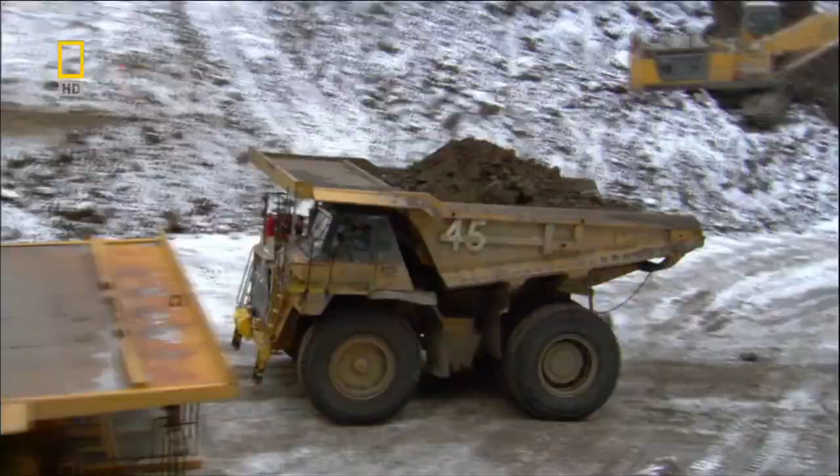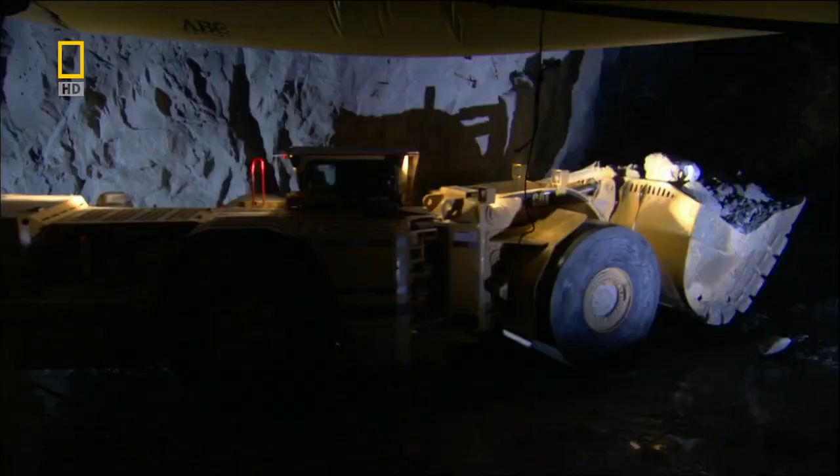Ready for some extreme machines? You don't know what big is until you've met the heavy metal mega movers at the Ekati Diamond Mine. Located just 200 kilometers south of the Arctic Circle, Ekati uses huge machines to work the tundra. Dump trucks as wide as your house, shovels bigger than a school, and drills taller than roller coasters. These monsters access more than 5 million carats of diamonds every year. To do it, they have to overcome incredible challenges, battling killer cold, moving mountains of earth, and blasting to dangerous depths. Only the toughest will survive.

Northern Canada, one of the most forbidding places on Earth. Early explorers called this flat expanse the Barren Lands. But for a team of extreme machines, this is home. The Ekati Diamond Mine, over 2,000 square kilometers of diamond-studded Earth.

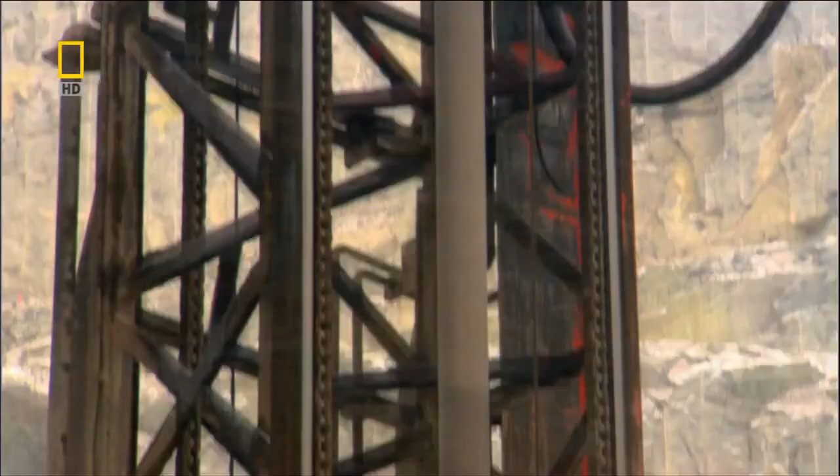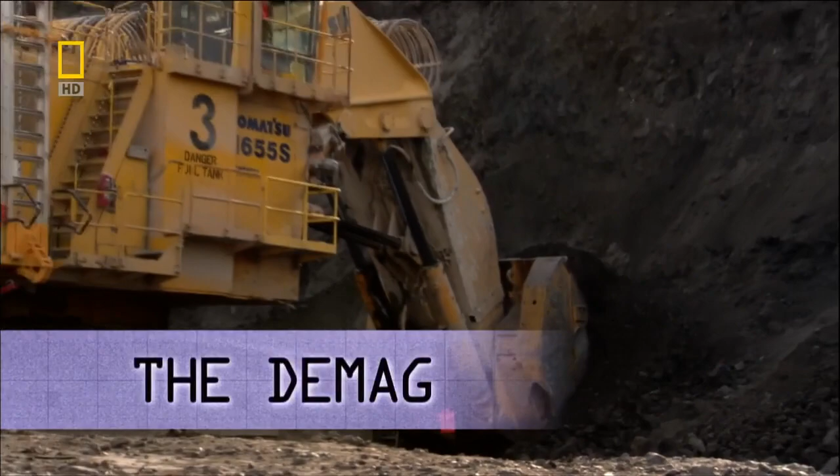Three mega movers partner up like heavyweight wrestlers to pull the riches from the land. The nearly 30-meter tall D90 rotary blast drill, aka the driller. The Demag 655 hydraulic shovel, a 4-story monster simply called the Demag. And the 160-ton Caterpillar 793 haul truck, nicknamed the Cat.

In their quest for diamonds, these machines will power through damaging rock and punishing weather. The future of the mine depends on their success.

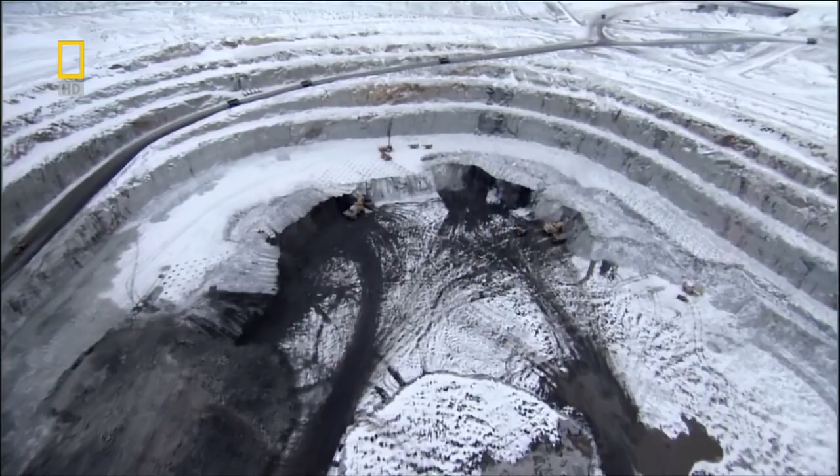The mega movers have two critical missions. First, build an underground tunnel to reach diamonds deep below an existing pit. Second, get a new pit, codenamed Fox Pit, into production, stat. The Fox Pit will be an open pit mine. That means it will be dug from the surface down. Tens of millions of tons of rock must be removed to access the diamonds below. The mega movers will have to work in expert coordination to move this mountain of earth.

The driller kicks things off with a blast. The massive machine bores holes as big as tree trunks for the explosives crew. Everything about this rig is big.

Here's a guy. Here's his home. And here's the driller.

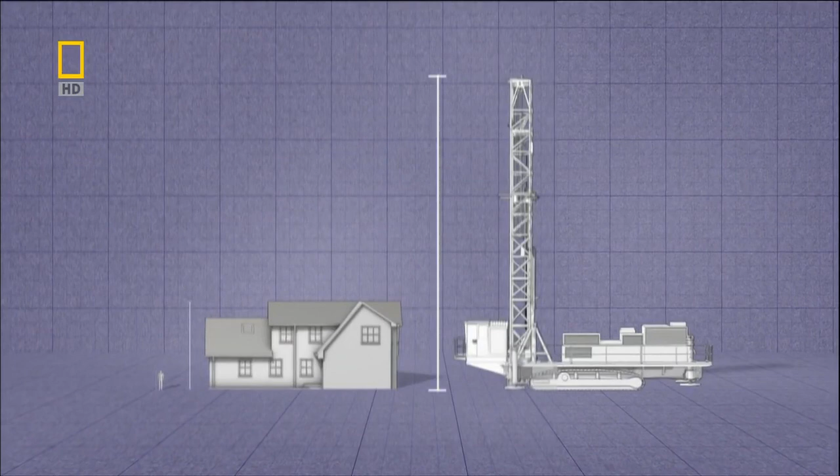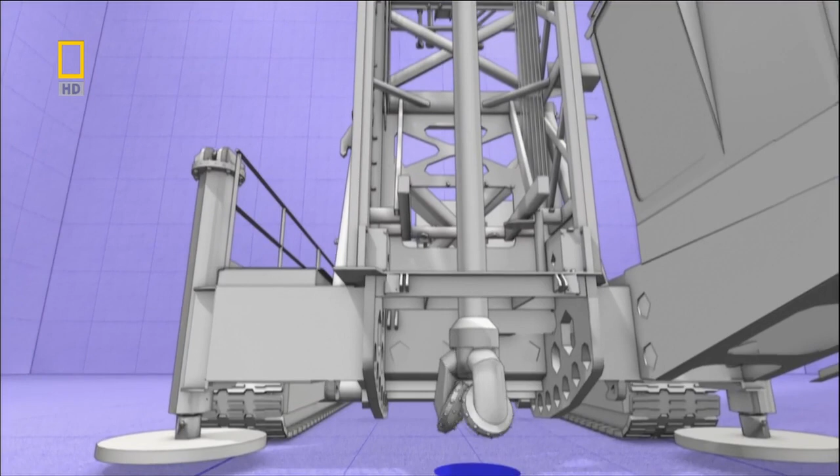The driller combines overwhelming power with a wrenching twist. 30 meters above, a massive rod slams down against the rock face. The sharp, angled tip can rotate nearly 100 times per minute. In just half an hour, it can pound holes one-third of a meter wide and 17 meters deep.

Once the driller's opened up a new section of the pit, his partners go to work. The captain of the team moves in, the gigantic Demag shovel, the biggest piece of machinery on Ekati's mine site.

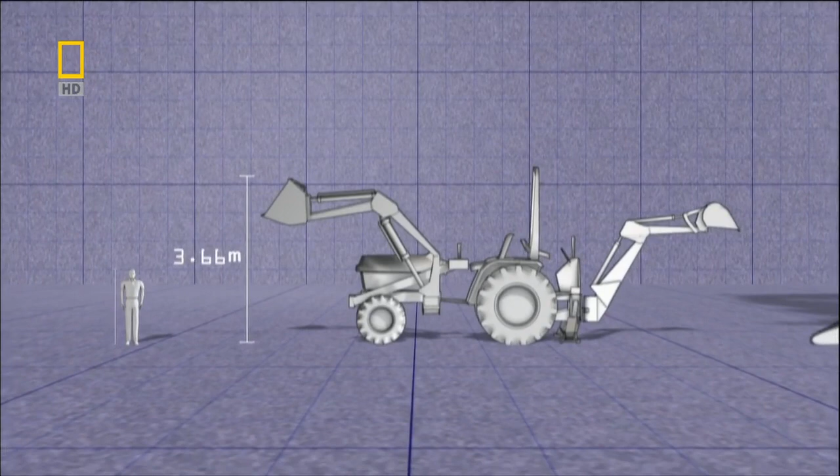This Demag operator stands 2 meters tall. And here's a 4-meter backhoe. And here's the Demag.

This monster stands 4 stories high with a shovel that can hold 40 men. Its jagged teeth are coated with a special steel alloy so that it can chomp through frozen granite, one of the hardest rocks on Earth. The 14-meter arm is powered by a pumping set of guns, 4 massive cylinders that give the Demag the strength it needs to carve the rock.

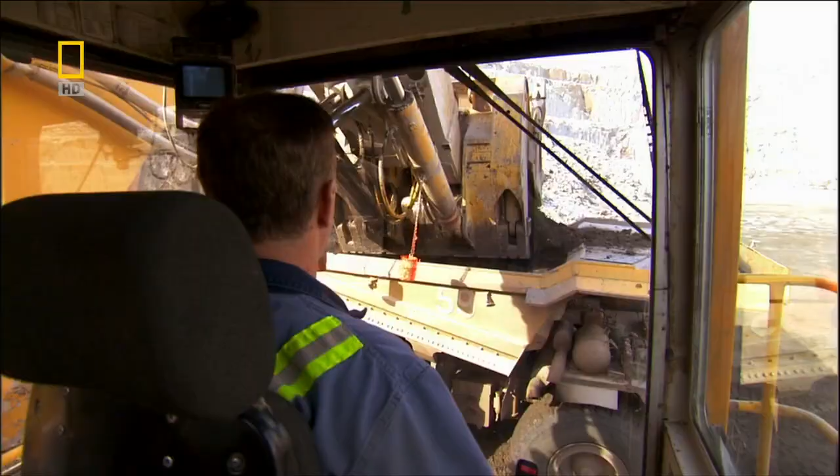When the Demag's teeth bear down on granite, the pressure's so intense it creates glass. The Demag uses this overwhelming strength to move tons of rock fast. It's incredible, actually. We can put about 240 tons, or 218 metric tons, on a truck in 2 minutes or less. We try and keep it under 2 minutes.

After grabbing a mouthful of rock, the Demag tosses the load to his teammate, the super-sized Cat haul truck. This bruiser tackles loads that would destroy ordinary machines. The Cat is just the truck to haul a mountain of subarctic earth.

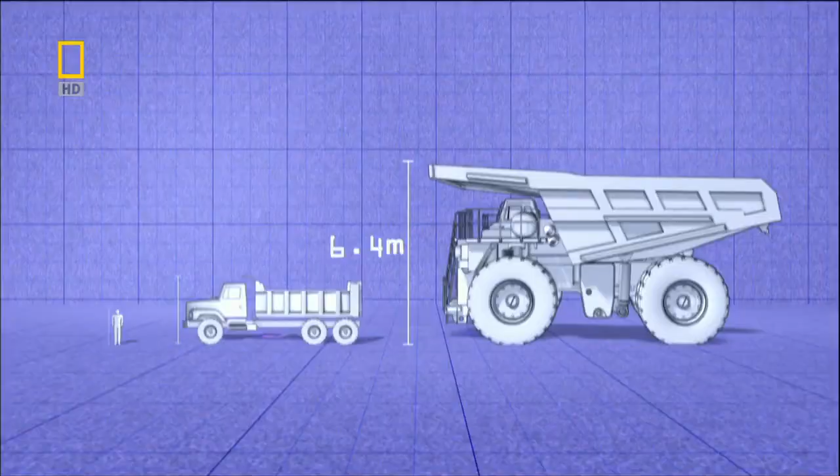Here's a Cat driver. And here's a normal dump truck. It's almost twice his height. And finally, the Cat. It towers over 2 stories high. Its wheels alone are nearly 4 meters tall.

But the Cat's most impressive feature? Its massive bed, so big it could carry a dozen cars. In the Fox Pit, the Cat's in constant motion, hauling hundreds of tons of ore.

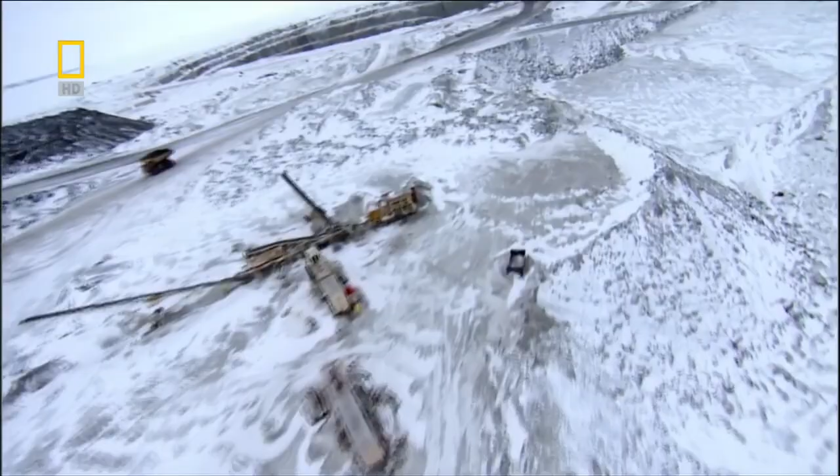This is an all-star team of heavyweight movers. Ekati needs tough characters if it's going to get the Fox Pit in production. Diamond mining anywhere is hard work, but in the subarctic it requires spectacular strength and determination.

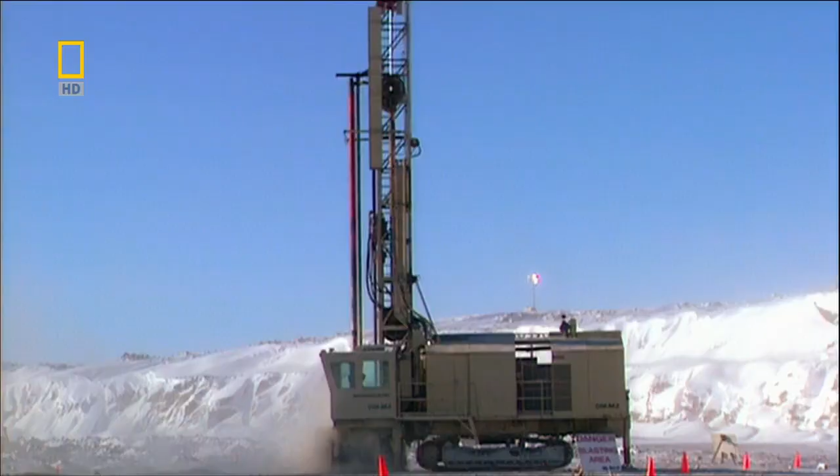For decades, few believed that diamonds could be found so far north. But in the 1980s, a team of geologists discovered special minerals, called indicator minerals, that are often found in diamond-rich regions. The geologists began hunting for diamonds, drilling deep underground. Just over 100 meters down, the team struck pay dirt, a mineral formation of some of the largest, highest quality diamonds ever discovered.

They christened the site the Panda Pit and formed the Ekati diamond mine. But the challenges were just beginning.

Like all mining operations in the far north, Ekati poses environmental hazards. Mining creates waste rock and pollutants and can disrupt wildlife. To protect the tundra's delicate ecosystem, Ekati works with the Canadian government to monitor pollution and oversee replanting to minimize the mine's impact on the land.

The operation's lasting effect is a matter of debate, but one thing is certain: as long as the public wants diamonds, they'll continue to be mined.

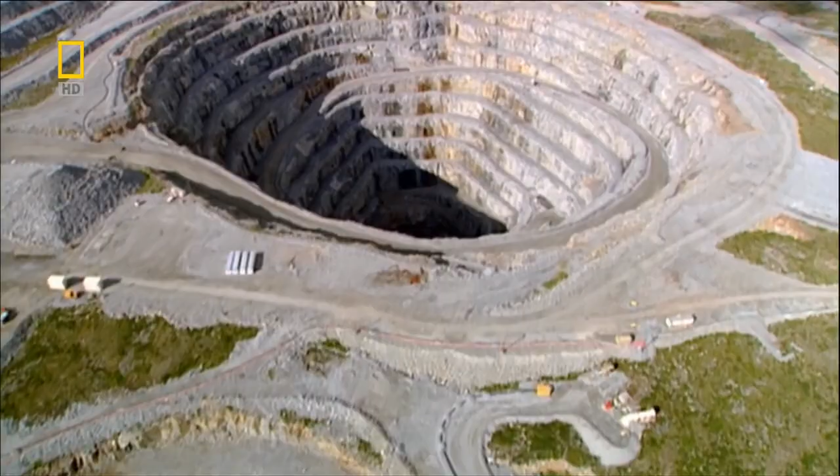Yet the valuable stones are a limited resource, and the surface pit at the Panda mine was harvested of diamonds over a year ago. It's now closed. But recently, Ekati came up with a radical new plan, one that could bring the Panda mine back to life.

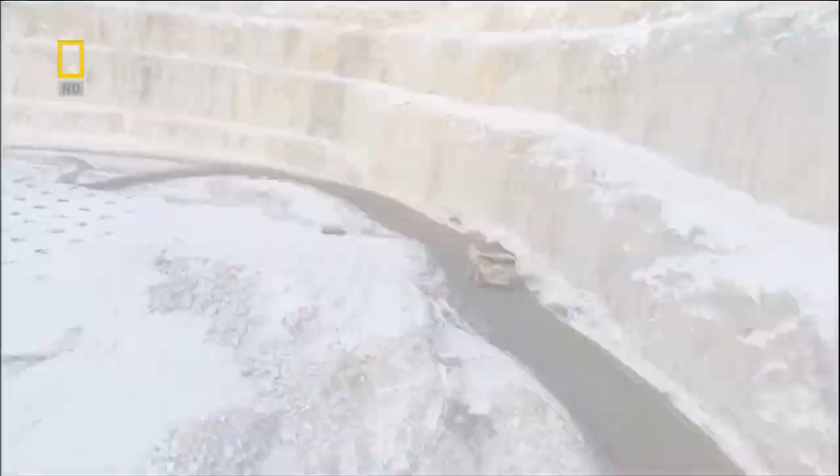Geologists believe a narrow pipe of diamond-rich rock lies waiting just below the Panda Pit. The trick is how to get it out.

The mega movers can't get this deep, but a tunnel could access the previously unreachable gems. To build it, Ekati will use a crack team of underground machines. They'll dig a tunnel 2 kilometers long, removing approximately 200,000 tons of earth. The project, nicknamed the Panda Tunnel, broke ground in 2003.

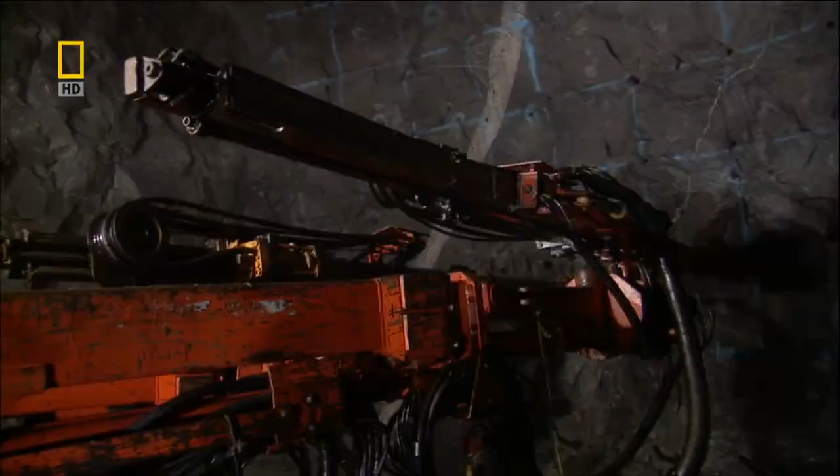If the mission is successful, Ekati can access a whole new stock of diamonds. Engineers say the Panda Tunnel could deliver close to 5 million carats, including some of the highest quality gems produced from the claimed site. The stakes couldn't be higher. Future loads from the Panda Tunnel and the Fox Pit have to yield pay dirt.

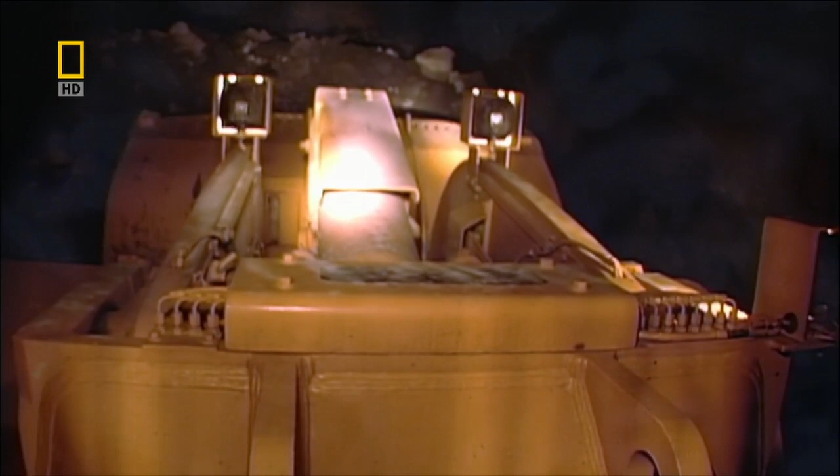Diamond-encrusted earth. These sparkly rocks are what the mission is all about. To get the prize, the mega movers will use muscle in the Fox Pit. But down in the tunnel, where the giants can't go, a crew of mining machines relies solely on strategy. The work will test both teams to the max.

Ekati runs on a brutally simple equation. The mine must find 1 carat of diamonds in every ton of ore.

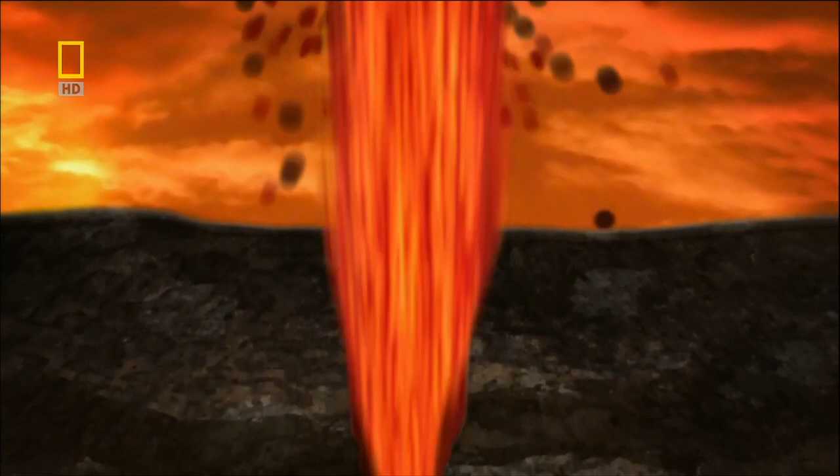This landscape may seem cold and forbidding now, but millions of years ago it was a subterranean hotbed of activity. Violent volcanic eruptions gushed from deep inside the Earth. Lava spewed upwards towards the Earth's surface. It carried a hidden treasure, tiny particles of carbon that had compacted from inner Earth pressure and heat. Diamonds. The diamond-rich lava quickly cooled. It formed carrot-shaped pipes of rock called kimberlite. These kimberlite pipes are what Ekati mines today.

The mega movers shovel out the large carrot top of the kimberlite pipe. And soon, with the Panda Tunnel, Ekati hopes to mine the narrow, rich root. But a major obstacle stands between the machines and their prize. A layer of granite surrounds the kimberlite like a bank vault holding gems. The only way to get the treasure out is to break in.

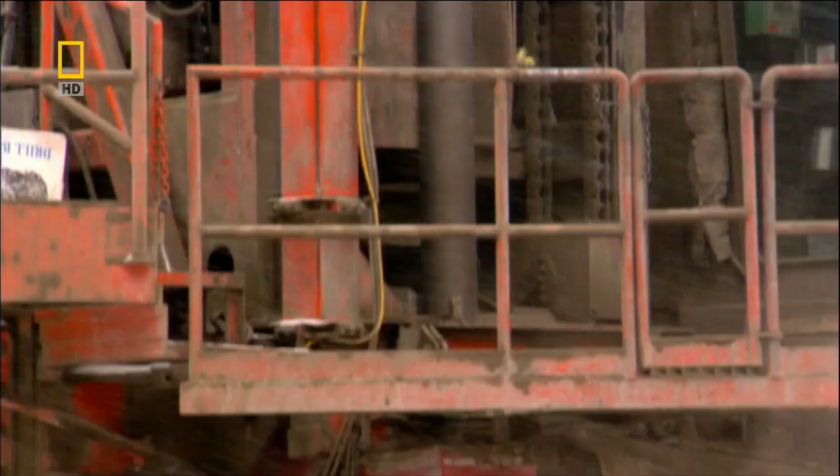Expertly trained operators drive the beasts. It takes months of on-the-job training to fill this seat. Perched high above the Fox Pit, dispatch hands out orders and monitors all that goes on below. Like a nerve center, dispatch is the brain behind the mega mover's muscle. It keeps the metal giants constantly moving in the right direction.

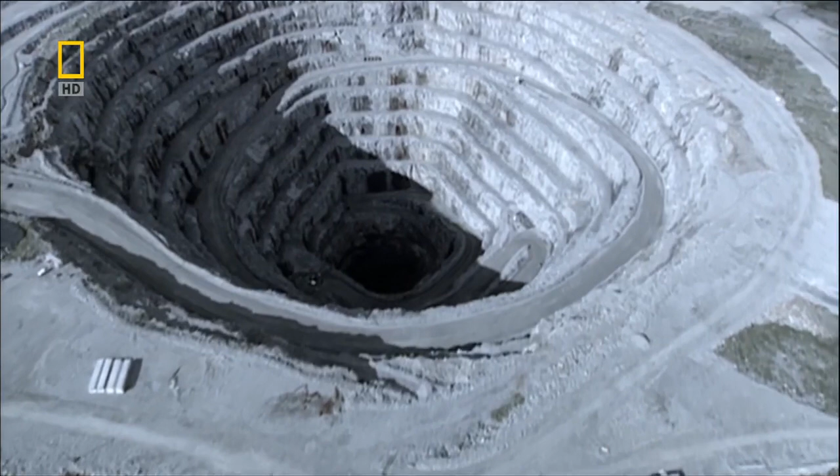The mega movers carve the pit according to the shape of the kimberlite pipe. The machines scrape away at the granite to reveal a dark layer of diamond-bearing kimberlite below. They make smaller and smaller circles as the carrot-shaped pipe descends into the earth.

The machines leave a platform as they sculpt. It's called a bench, and it strengthens the rock face. The terraced walls protect against deadly landslides, and they offer an easy way in and out of the pit.

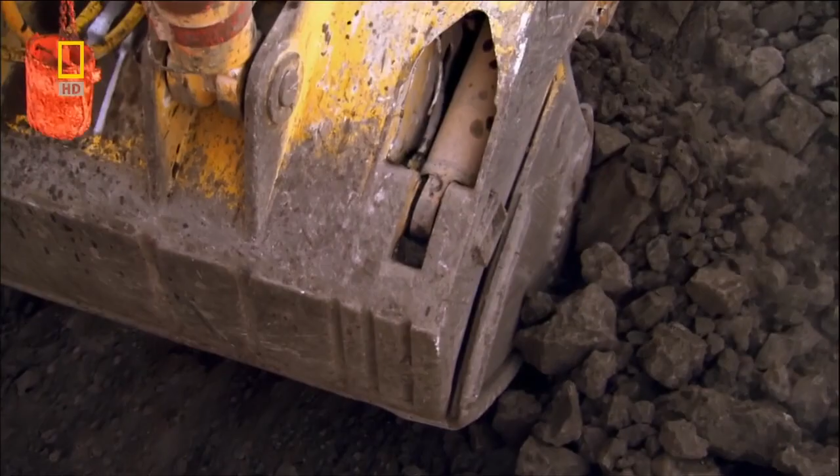The mega mover's assignment in the Fox Pit is deceptively simple. The machines remove 500,000 tons of granite and kimberlite every week. But here in the subarctic, the vicious cold and granite can take their toll, slowing the machines down. For Ekati, movement is money, and staying in motion is the only way to get the job done.

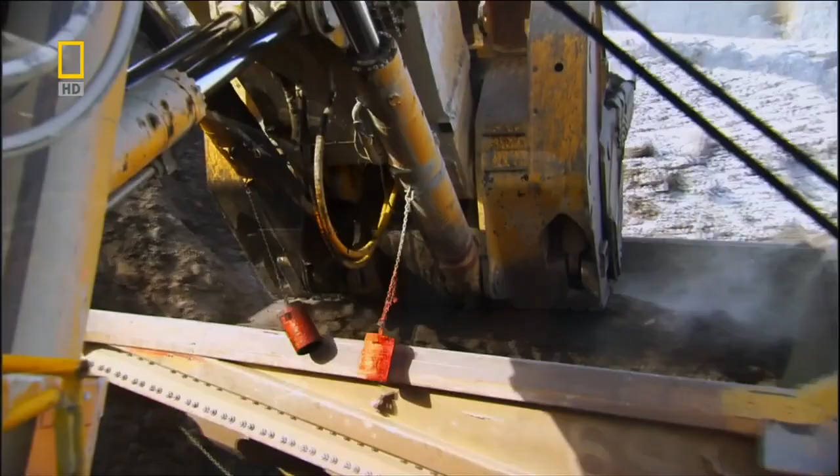The mega movers tackle the challenge with a proven 5-step strategy: drill, blast the rock, scoop up the rubble, haul it to the plant, and separate the diamonds from the dirt. It all starts with drilling time.

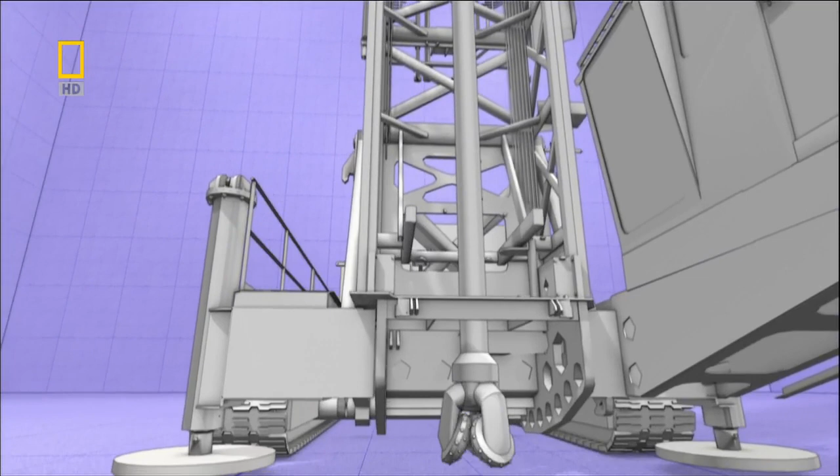While 4 leveling jacks hold the base steady, the driller locks and loads. Each time the drill bit hits the ground, sharp angles on the bit chip the earth. It rotates so fast, it looks like a twister. In less than 30 minutes, the driller makes a 17-meter hole in the armor-hard rock.

But even the driller has a tough time with the resistant granite. The rock wears out dozens of drill bits a month. After drilling about 100 holes, it's time for another bit. At $3,000 per bit, it's a pricey operation.

Just the pounding that the drill bit does to get down to the solid rock, that's what takes a toll on a bit.

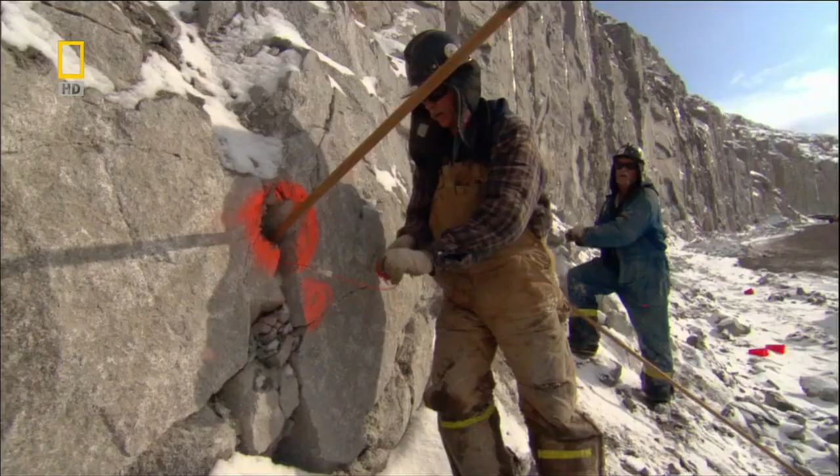Meet the demolition team, a 4-man crew known as the Blasters. 12 hours a day, the blasters feed the drillers' holes with packs of ammonium nitrate, often braving falling rocks and temperatures so low they can snap freeze exposed skin in seconds. We do try to do it as efficiently and safely as possible, because things go wrong, and that's not a good thing when you're dealing with explosives.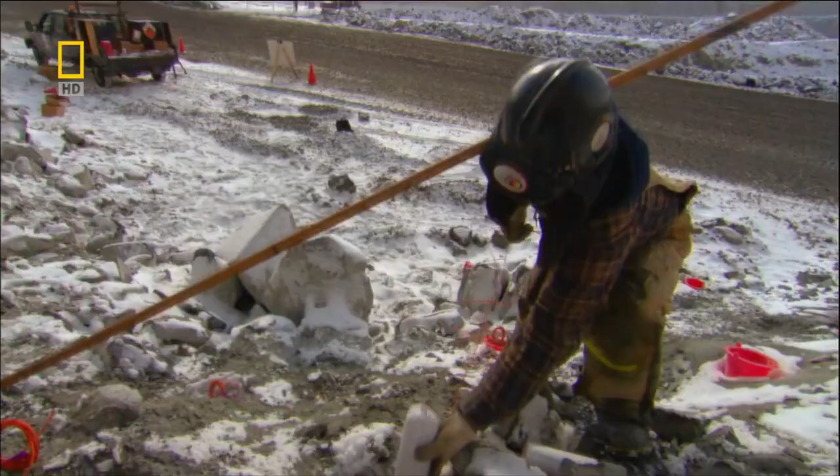The blasters map out the detonation site. It's more than a half-kilometer long plot. They follow a plan called the blast pattern that shows where to place the explosives. Today's blast pattern has almost 200 holes. The blasters plant each with about 800 kilograms of explosives, enough ammonium nitrate to rip a man to pieces and turn granite into flying shrapnel.

The detonation will demolish about 50,000 tons of rock, a huge chunk of the pit face. To see how big that is, watch as everyone clears the pit. The last truck out crosses right over the demolition zone. It looks like an ant on a highway.

Now, blast time. 5, 4, 3, 2, 1.

Let's see that again. A main detonation wire links the fuses on each of the blast holes. As the main line burns down, the explosives ignite in a flash of red like a string of firecrackers.

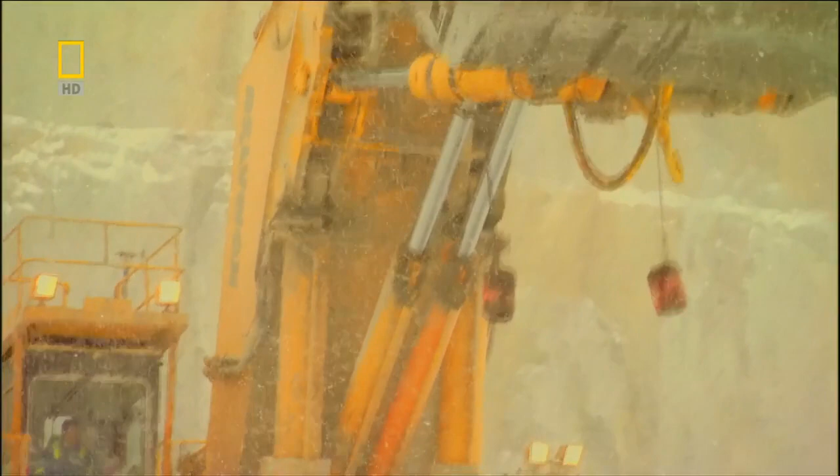Next, step 3, shovel, starring the King Kong of Ekati, the Demag. This brute is the first mega machine back into the danger zone, ready to devour the remains. The Demag is an insatiable monster. Every hour its bucket or clam scoops up to 4,500 tons of kimberlite, the equivalent of 900 school buses.

It has to move fast. The operator has just 5 seconds to load his bucket and just 30 seconds between dumps. This heavy lifting requires brawn and brains.

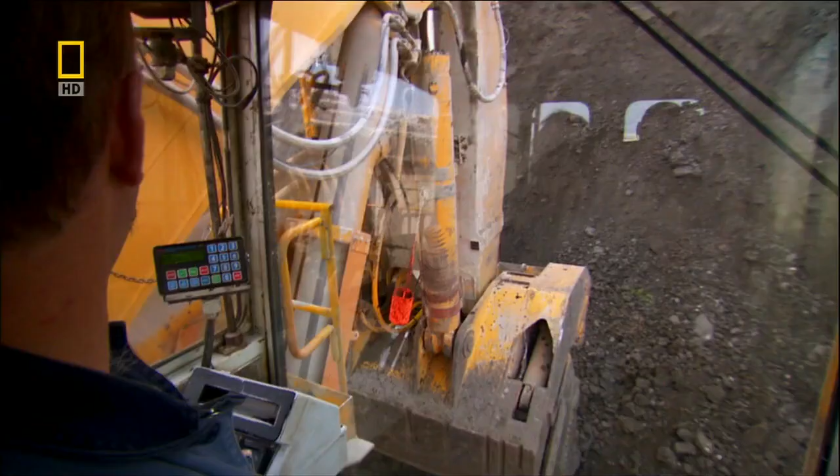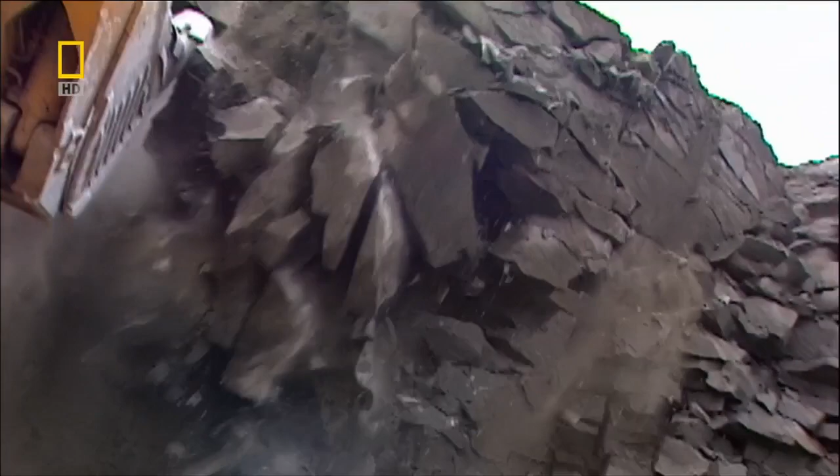As the Demag shovels, it sculpts the pit face. Using its full 4 stories of height, the Demag pulls away the crumbled rock, starting at the bottom of the pile and carefully scraping up. One false move and tons of unstable rock could come pouring down the cliff, and a granite landslide is an ugly way to go. Just in case, the Demag has an armored windshield and a dead man switch to cut the engine if the situation gets out of control.

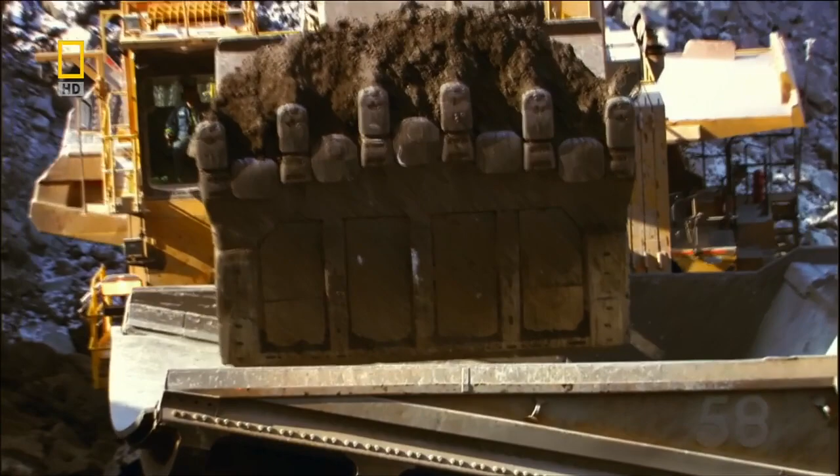Step 4, hauling with the cat. Where there's a DMAG, you're always sure to find its accomplice, the cat, ready to carry off the loot. The cat is the team's champion weightlifter. It catches 4 full scoops from the Demag before filling up. The cat's designed to catch punishing loads.

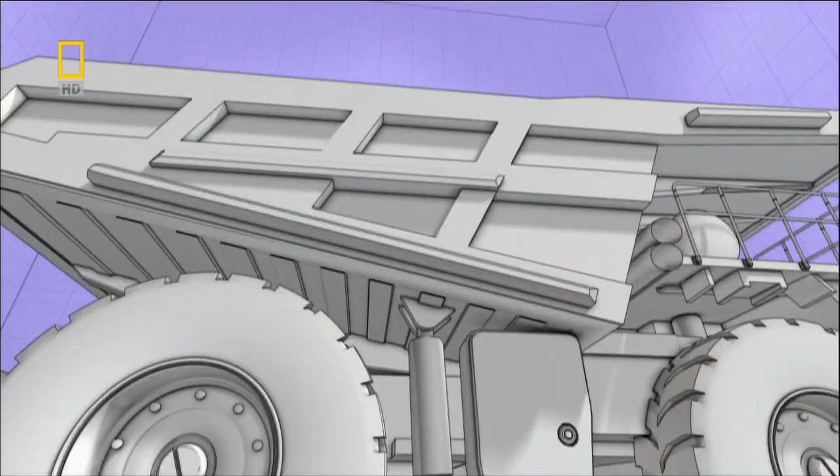An 8-degree V-slope bed gently receives unstable loose rock and shifts it to the bed's center. This protects the cat from losing its balance during loading, an important feature when the mega truck's hauling 218 tons of diamond-studded rock. That's like carrying 3 dozen elephants. Few other dump trucks on Earth can handle such a heavy load. Hugging the steep access road, the cat prowls to its final destination.

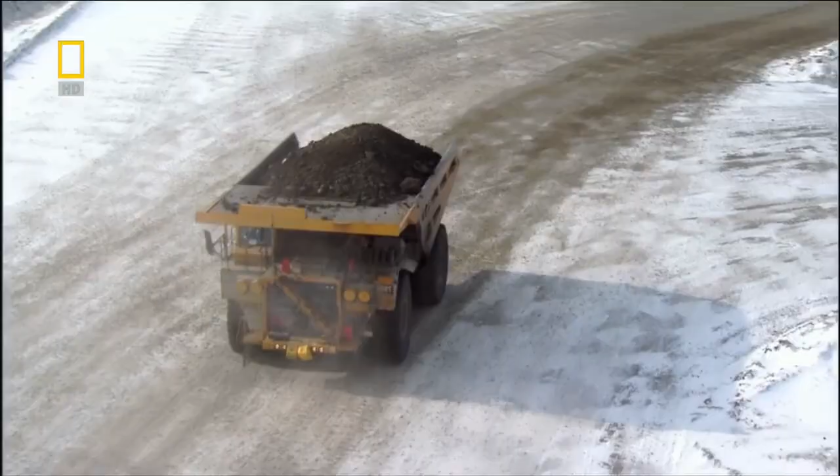Step 5, processing. The process plant is the heart of Ekati's mining operation. It's here that diamonds and dirt part company. This is a non-stop operation, processing 12,000 tons of kimberlite ore a day, 24 hours a day, 7 days a week.

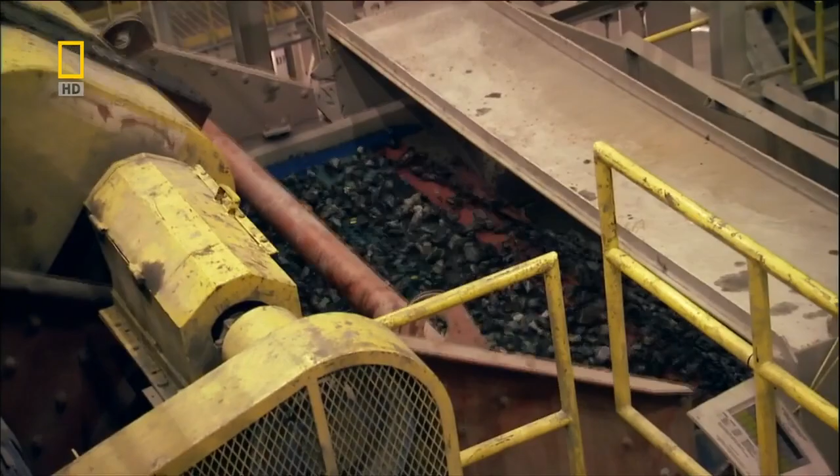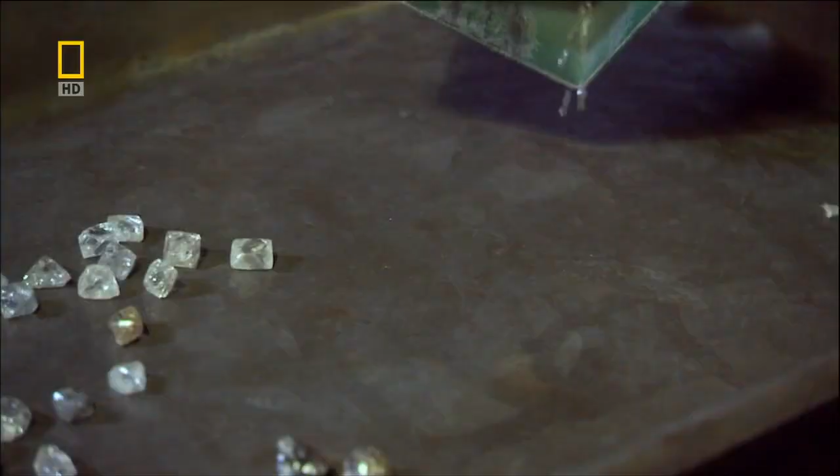At the plant, the diamond-bearing ore is crushed and scrubbed, ground and sorted. In the final stage, the diamonds are recovered via X-ray machines and grease tables. From this, the plant yields about 1 diamond carat per ton of ore. That's about a coffee can of diamonds a day. It may not sound like much, but at that rate, Ekati extracts about 5 million carats of diamonds a year. The rough stones are then cut and polished and sent to Belgium to be sorted and sold.

As the mega movers push ahead in the Fox pit, deep underground, the Panda team moves closer to their goal. A band of unique subterranean machines have been constructing the tunnel for months. The tunnel is a narrow 5-meter wide passage stretching down to the kimberlite pipe, only 40 meters in diameter. A conveyor belt will bring the ore directly to the process plant. If this were to scale, the tunnel would look like a thread.

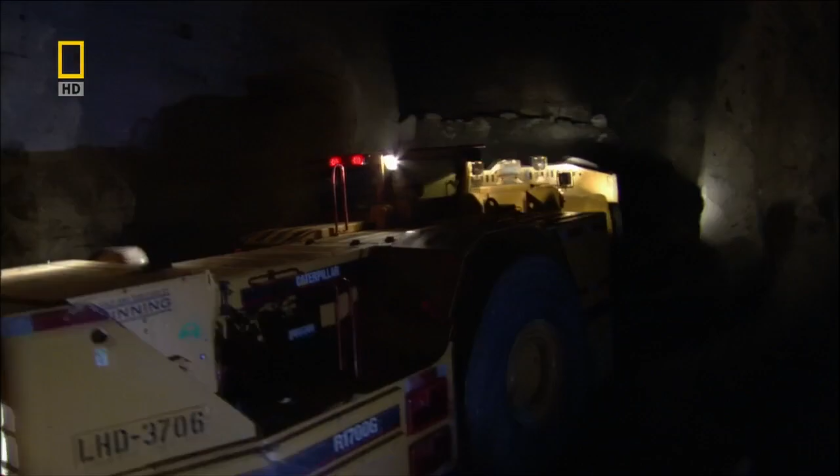Tunnel construction is always challenging work, but the Panda tunnel is harder than most. It will be extremely long, more than 2 kilometers. At that length, getting the tunnel to line up with its target is a high-stakes feat of engineering. Even the slightest miscalculation in direction can take on troublesome proportions over a 2-kilometer course. And this tunnel must be completely straight, or the conveyor belt can't be installed.

To make matters worse, down here, compasses aren't accurate. Instead, engineers must rely on charts and graphs. Above ground, the machines win with muscle, but underground, precision and accuracy are what counts. The engineers regularly check coordinates. At the moment, the tunnel looks spot on. We've done a test hole, and from the test hole indications, the line is bang on, and the elevation seems to be pretty close to where we should be.

As the team digs towards the hidden treasure, the Ekati camp braces against an approaching deadline. The mine depends on the outside world for supplies, but a change of season is about to force their supply road to close. The next few days are Ekati's last chance to haul in most of the crucial supplies the machines need to pull off their missions. Without the right equipment, the mega movers won't make it through the months ahead.

Ekati is one of the most remote diamond mines on Earth. Located in Canada's Northwest Territories, it's just 200 kilometers below the Arctic Circle. The closest city is Yellowknife, over 300 kilometers away.

Keeping Ekati and its monster machines rolling is like taking an army to the dark side of the moon. Mega parts, fuel, building materials, everything has to be shipped in. It's a huge job, requiring a fleet of monster trucks called Super Bs, which can haul 80 tons in a single load.

But there's only one road into Ekati, the Ice Road, made almost entirely of frozen lakes and marshlands. It can only be used for a brief 8 to 12 weeks in late winter, when the ice is thickest. The rest of the year the weather's too warm, the frozen lakes melt, and the marshland becomes dangerously soft, unable to bear the weight of the Super Bs.

This means the trucks have just 2 months to haul a year's worth of the most critical supplies to the camp. If they fall short, the mega movers won't have what they need to run, and the mine could face a shutdown. Now, with spring right around the corner, the final convoys embark on a risky trip across thinning ice.

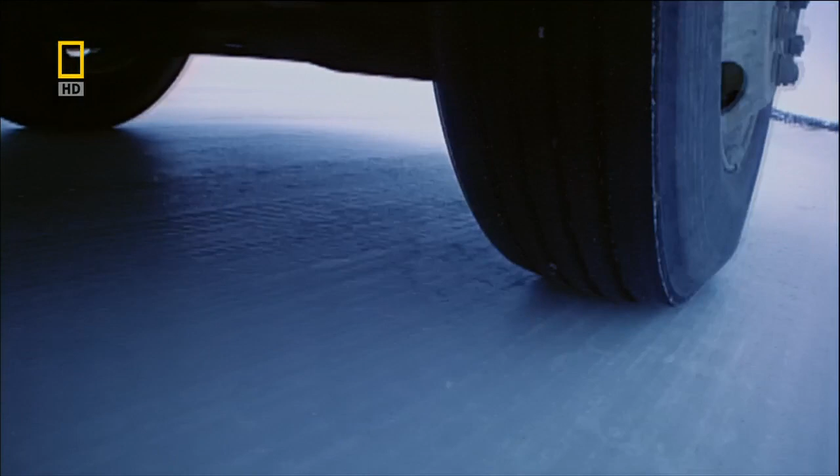The loads that are coming now are priority loads that have to get in, that can't be flown. The trucks are loaded with critical supplies: ammonium nitrate to blast the frozen rock, and a special Arctic-grade fuel to keep the mega movers running in the subarctic. It's an explosive payload, made even more dangerous by the ice road's deteriorating condition.

After just 2 months of use, it's torn up from the heavy freight trucks. This last caravan will have to be careful not to put too much weight on the ice road at once, or risk crashing through.

So the Super Bs travel in small groups of 4, driving a kilometer apart to give the road time to heal. As we're rolling along, you're fracturing the ice and there's cracking taking place. With a kilometer apart, you get a chance for the ice to heal a little bit, and also it doesn't put too much weight in any one spot.

15 hours later, they roll into Ekati. The dangerous run has gone off without a hitch. But there's a development at the mine.

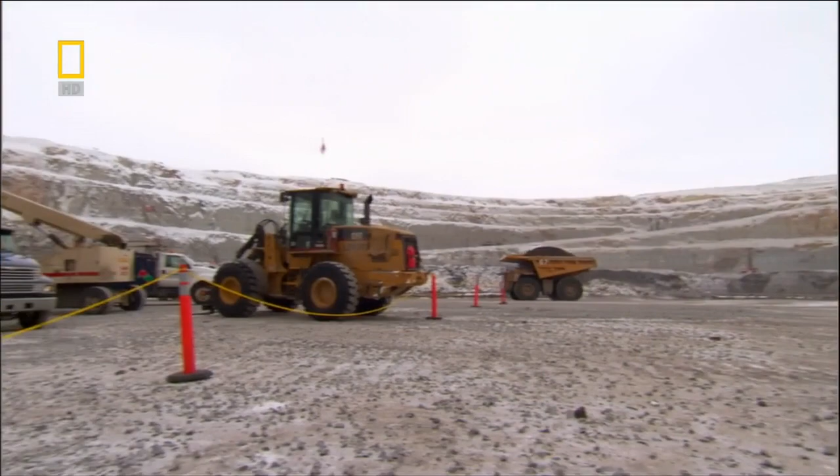The mighty Demag, the super shovel, is showing signs of slowing down.

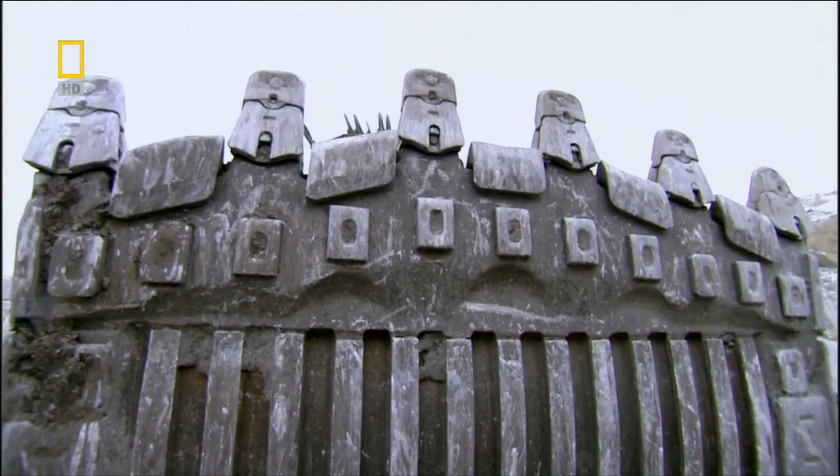In this killing cold, maintenance is a must. The mega movers undergo routine checkups about once a month. It's the only way to protect the machines from the damaging weather. This clam or bucket has probably close to a foot of steel thick in the base, and in extreme cold it can crack right out. We can drop those teeth off very easily, just snap off a tooth like a carrot, and then we're in all sorts of trouble.

Gary Ayres supervises maintenance at Ekati. He pulls the Demag out of action for a scheduled tune-up. But he and his team must work fast. They have just 48 hours to diagnose and fix the mega mover. Any longer, and the cold can seriously damage the machine.

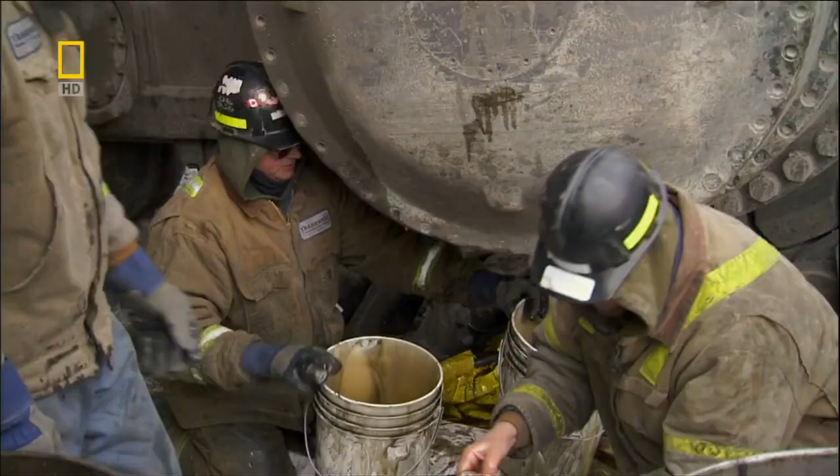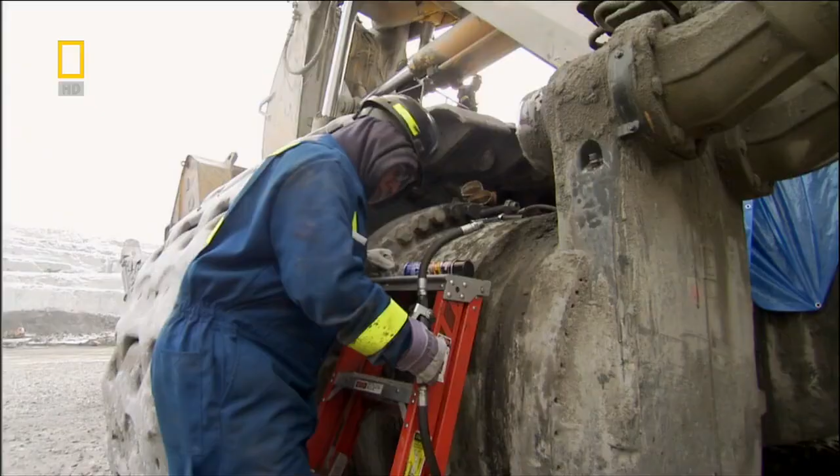They've got a lot to do, and even small jobs become mega work on a machine this big. Try getting an oil change on a machine that uses over 10,000 liters. Next, lubing all of the joints, the Demag has hundreds. In this extreme cold, the grease on the joints freezes and loses its lubricant quality. If a joint goes too long without new grease, catastrophic failure occurs, as the moving parts create so much friction they weld together and lock in place.

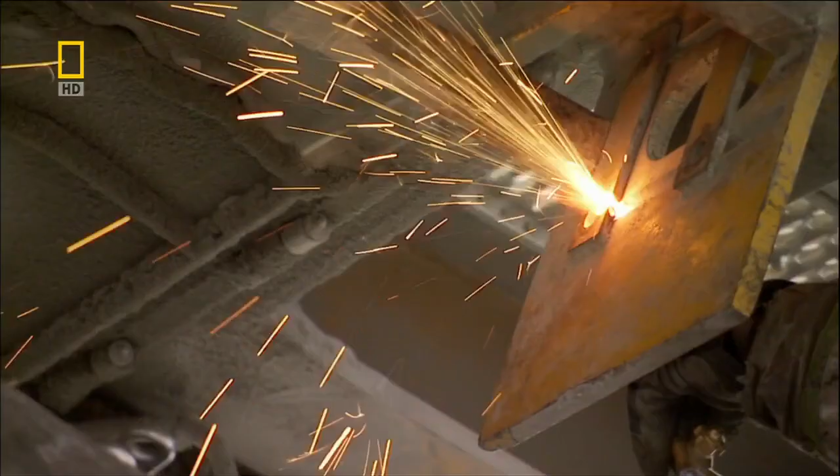As one team tackles the joints, experts focus in on a damaged cylinder. A falling rock dented the metal. The casing could spill oil, a huge environmental hazard. The Demag can't work until the cylinder is replaced. The maintenance crews get to work. Without a Demag, the diamonds won't dig themselves.

While the Fox Pit slows down, below ground, the fearless Panda Tunnel team surges ahead. The beasts that dwell down here are specially designed for such conditions: long, flat, compact. The scoop tram, the haul truck, and the powerful jumbo drill. These are the underground cousins of the giants that work the Fox Pit.

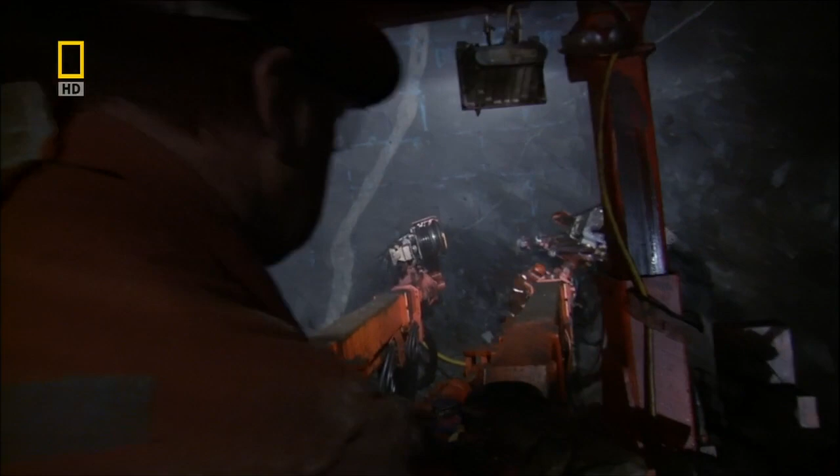But instead of brute force, these machines rely on precision planning to reach the diamonds. They're the elite safecrackers of the mining world, and this dangerous environment demands a careful strategy. Their first move: punching holes for the explosives. The 20-ton jumbo drill pounds into the granite. This machine has 2 muscular drilling booms, so it can do the work of 2 drills at once.

Add too much nitrate and there will be more destruction than the small tunnel can handle. The tunnel's 5 meters tall and 6 meters across. There's no room for a mistake. The team retreats and waits for the terrifying roar.

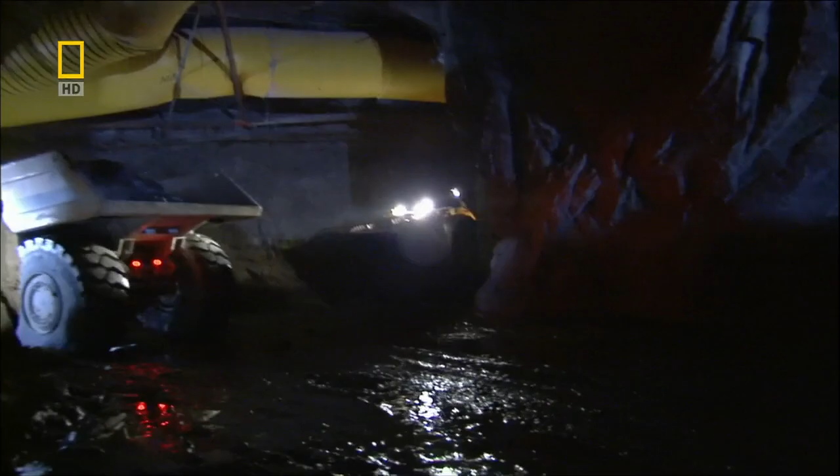Flattened and compact, it weighs just 40 tons when empty. It's only 10 meters long and can turn on a dime. But this baby can haul nearly 45 tons of rock in a single load. That's like moving 8 mobile homes at once. It hustles up the ramp to empty its bed and return for more.

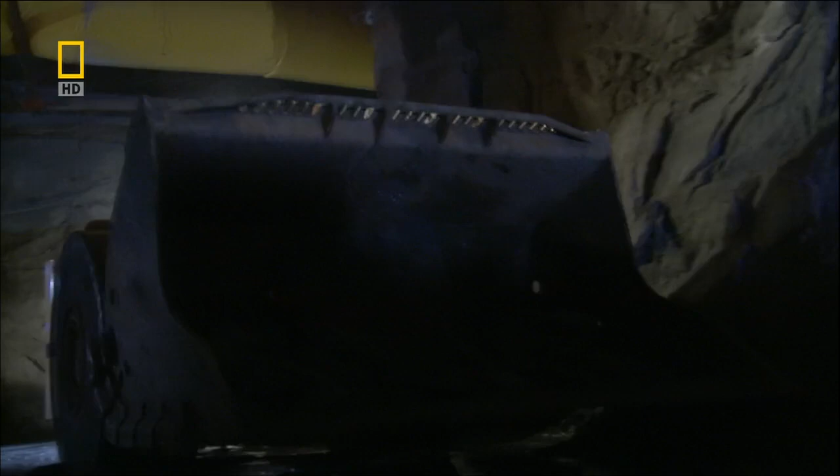After a couple of passes, the entire pile of muck is gone. And the tunnel's 5 meters longer. But the work's not over yet. The tunnel walls and ceiling are a minefield of potential falling rock. A silent killer could come raining down, blocking the new passage, or worse, killing someone. The tunnel must be made secure.

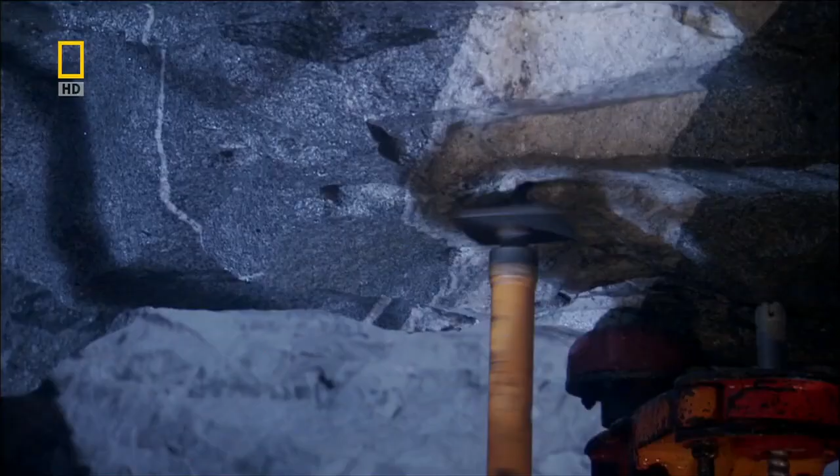The automated rock bolter takes the stage. It builds a sturdy infrastructure for the new section. First, it drills holes into the tunnel ceiling. Next, it inserts 2-meter rebar rods, locking them into place with resin and steel plates. The rebar resin mix works to cement the rock in place. Further support comes from a wire mesh spread over the rock's surface.

The safe crackers have burrowed 5 meters closer to the prize. And now that the new section's secure, they start the whole process over again. To build the 2-kilometer tunnel, they'll need to move about 200,000 tons of dirt. They'll have to work fast and hope they're on target.

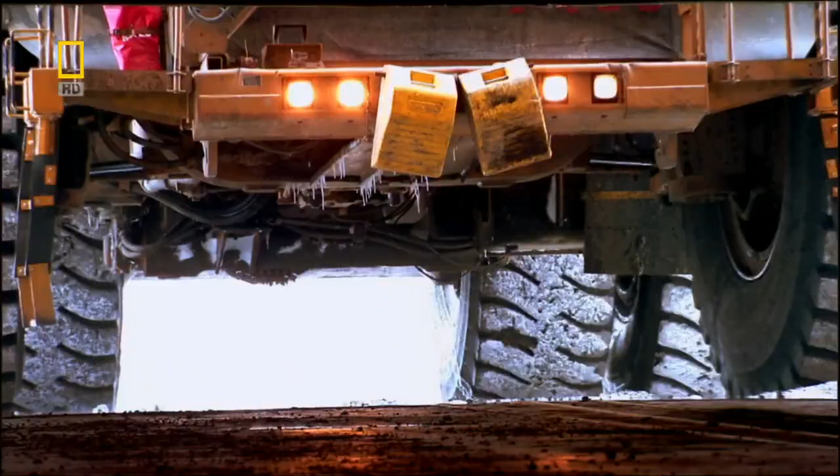As the mega movers wrestle on in the Fox Pit, the subarctic cold claims another victim. The metal giant's already lost a Demag, temporarily. And now there's trouble with one of the 13 cats. The team's down 2 players. That's a big problem if they're going to stay in the game. Once again, their mission depends on expert maintenance.

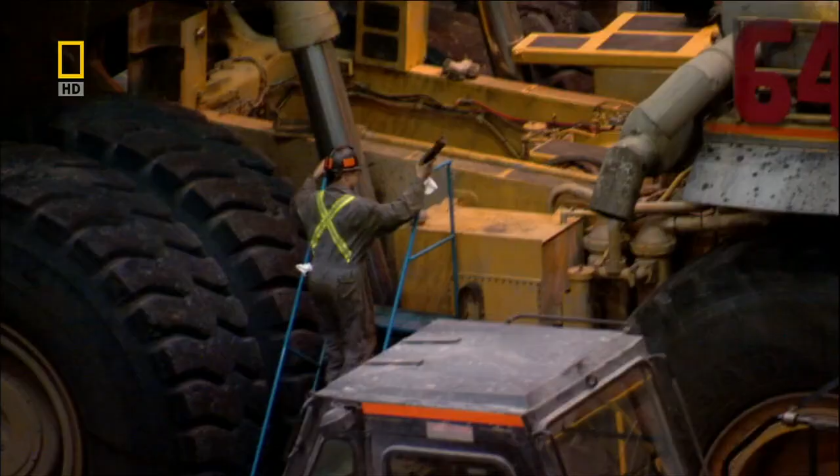The cat rolls into the repair shop. The job here is simple: get the haul truck back in action as quickly as possible. The maintenance team responds like a pit crew at a stock car race. Most of the time, the cat needs light maintenance, new tires or struts. But today, it's got real issues. It's suffering from engine trouble, a mechanical heart attack.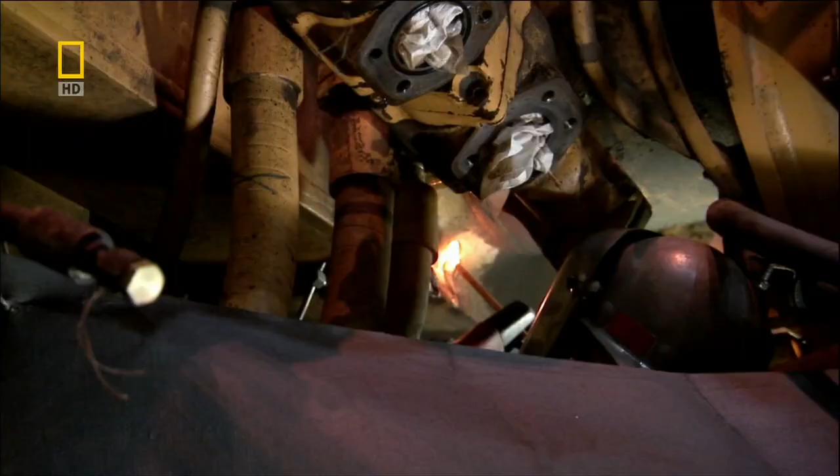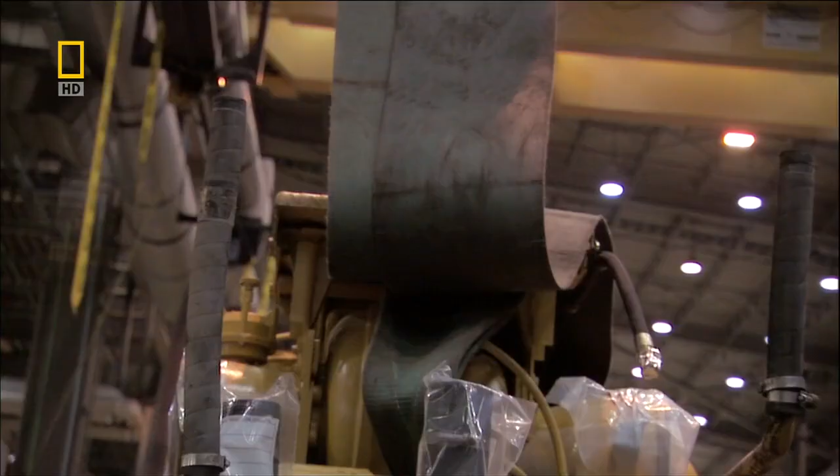Ekati needs the cat back in the game. The fastest way to do that is a transplant. Thanks to the Ice Road convoy, a new mega engine is standing by. The cat's ailing heart is eased out, all 12.5 tons of it. The new engine hovers nearby. This is high-stakes surgery. One false move could damage the engine and the machine.

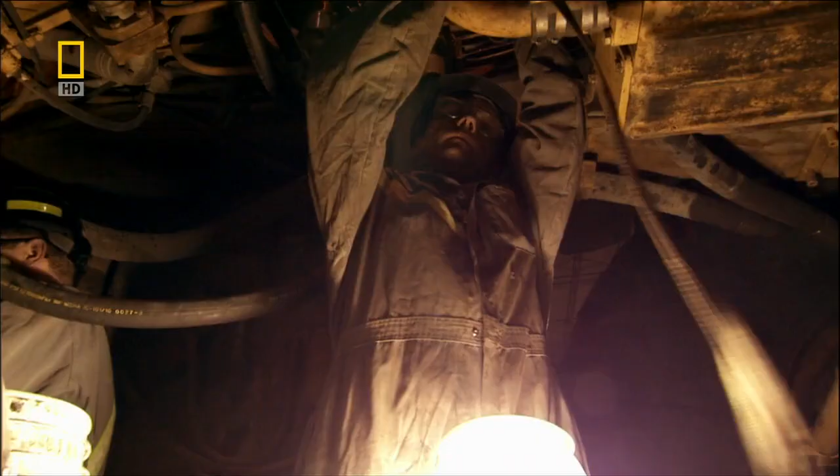Another foot back, and then we can come straight down. The engine catches on a groove. It's hitting something up top, and I'm not sure what.

The engine is in. There's barely time for backslapping as the cat roars back to work. The pressure's on. This mega mover has some catching up to do.

Across campus and underground in the Panda Tunnel, the conveyor team is also facing a critical test. Today, a survey team will check the tunnel's course. Now, the million-dollar question: are they on target? A surveyor takes measurements, using a laser and a survey tool called a theodolite to pinpoint the exact location of the tunnel.

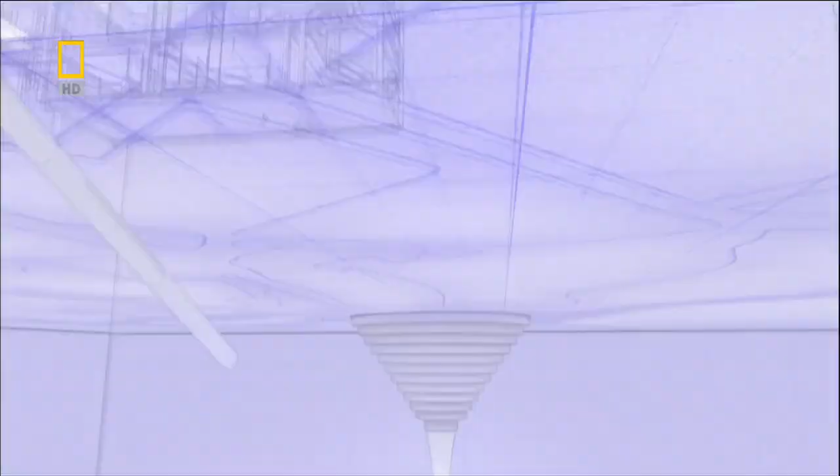An error this severe will make it impossible to install the conveyor system. It's a huge issue because any curve or any turn in it, the installation of the conveyor can't take place. The team has to straighten out the problem, literally. They can't fix the tunnel from here, but they can redirect it by building towards it from the bottom of the Panda pit. It's a backup plan they've been holding in reserve. Now they put it into action.

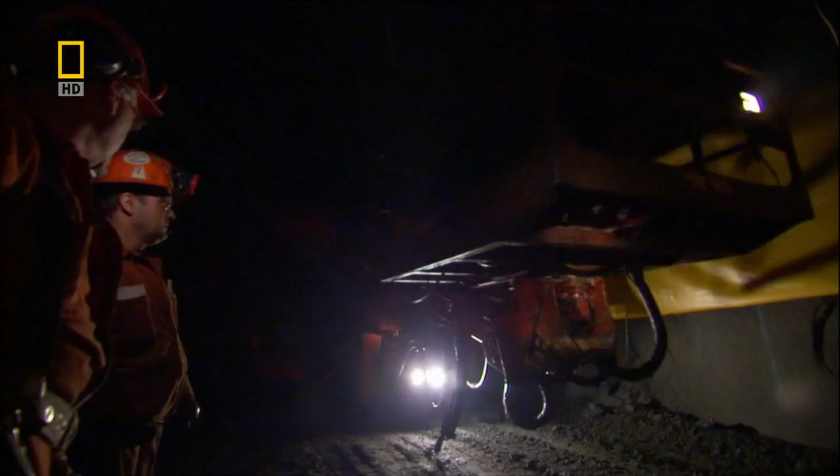The machines relocate, using a narrow passage on the edge of the kimberlite pipe. From there, they'll start digging up towards the original tunnel, working at a new angle so that the two ends line up. The team of underground giants gets to work.

Above ground in the Fox Pit, the captain of the team is completing its physical. A dented cylinder in the Demag's massive arm has been successfully replaced. But then, just when it looks ready to roll, a mechanic discovers a potentially fatal problem.

Hidden under the granite grime, a crack. We just found a major crack on the bottom of the car body, about a 3-inch crack that comes down the side of the car body and up across the top of the upper lip. It's a hairline fracture in the most important part of the Demag, the car body.

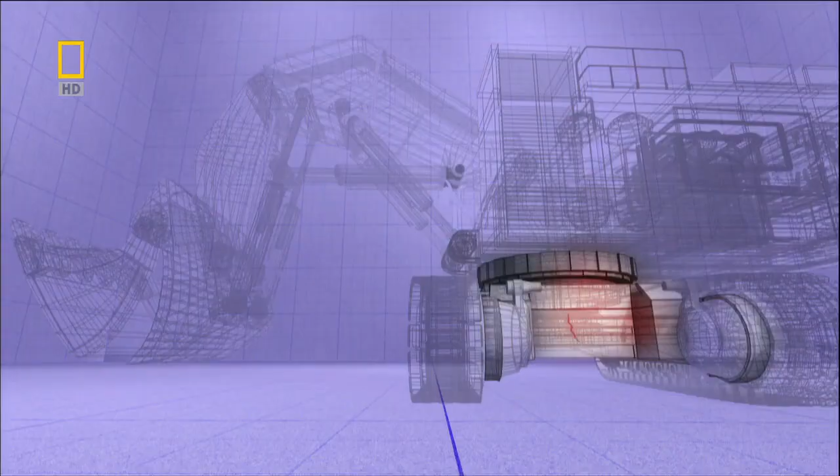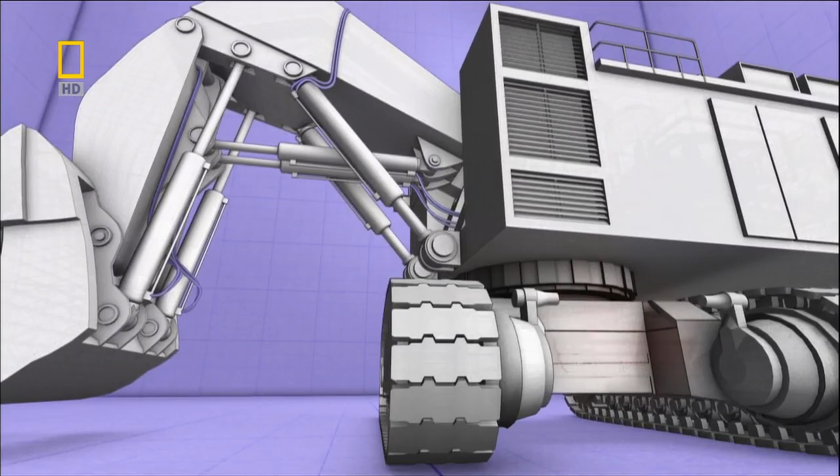Like a spine, the car body joins the two tracks of the vehicle, holds the superstructure in place, and supports the massive hydraulic shovel. If the crack isn't repaired, the vehicle could collapse in the middle of operation. But fixing the crack will take time, and that could cause even bigger problems.

Not only could the prolonged cold seriously damage the DMAG, but the entire mega team could suffer. When the Demag's down, it has a domino effect, throwing all of the other machines off schedule.

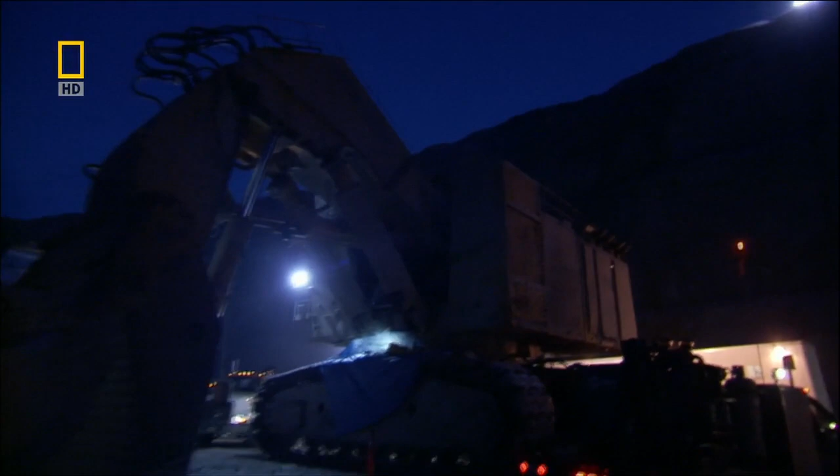The team works as fast as possible. There's a slight chance they could fix the Demag within the critical 48-hour window. Daylight and the deadline are just hours away. For the Demag, it's a battle against time and the elements. The super shovel's future and the mega team's success hang in the balance.

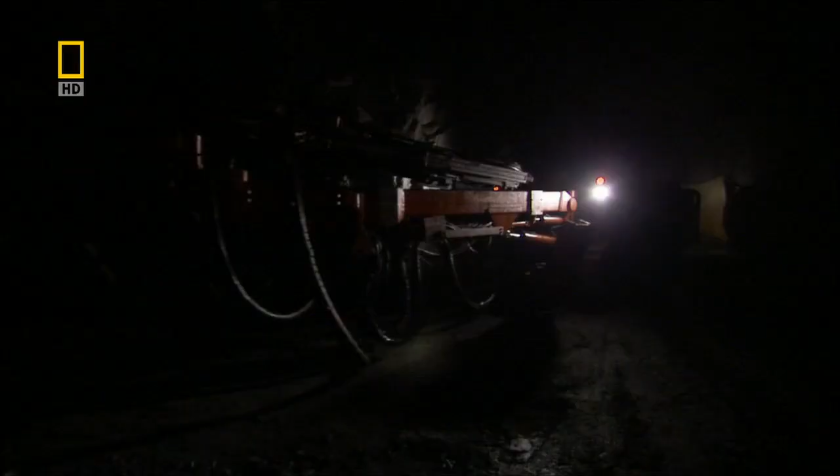It's 0 hour in the Panda Tunnel at Ekati Diamond Mine. The team has worked for over a year to construct the tunnel from the process plant to a previously unreachable section of kimberlite pipe.

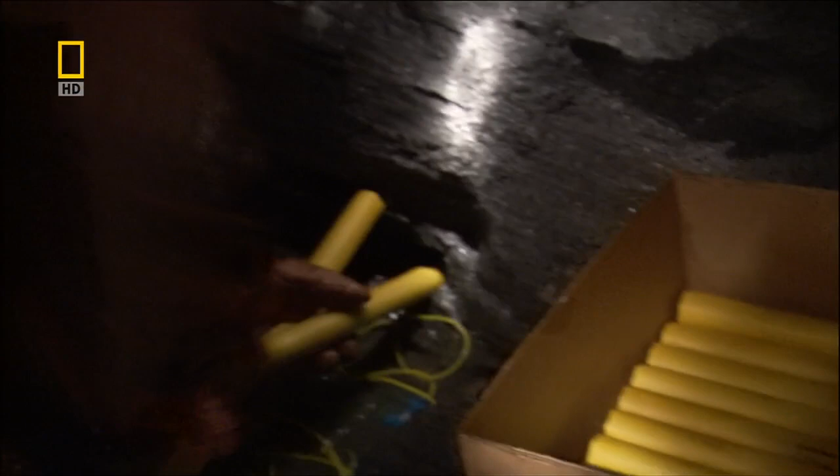The explosives have to be placed perfectly in order to control their destructive power. The slightest mistake and the blasters could blow up a support wall, triggering a massive cave-in. Unlike the Fox Pit, the depths of the Panda Tunnel offer no escape.

The mega movers and miners take shelter at the top of the tunnel. They're seconds away from a massive explosion that will bring either a diamond-rich future or failure.

And out of the darkness, has it worked? In slow motion, watch as the main fuse ignites the individual explosives. Their detonation pulsates out perfectly, obliterating the dividing wall, but leaving the support walls intact.

And behind the huge gaping hole, success. The bottom tunnel passage is almost perfectly aligned.